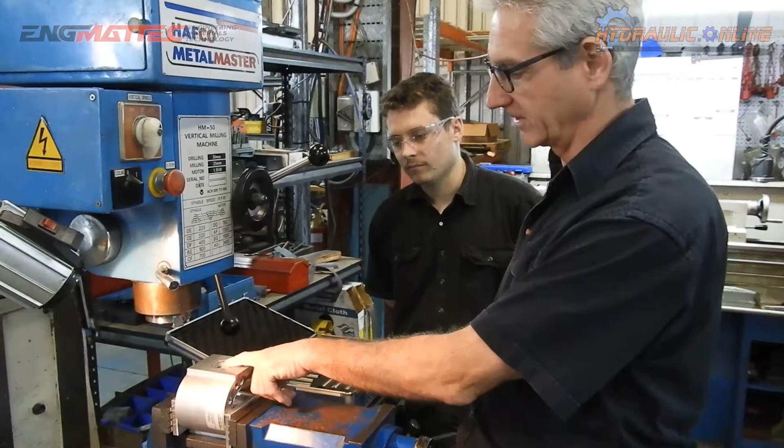It's going to vertically bore a damaged port because the threads are shagged. Doesn't look too shagged there, but if you look there...

It's a UNO port, an 1 1/16 UNO port, and we are going to bore it to 1 inch BSP parallel. So this is a vertical mill, and we're going to change the chuck here. We actually use this mainly for drilling, but we're going to convert this. This is actually a milling drilling machine, but we're going to convert it into a vertical boring machine by changing this attachment. And then we're going to mount this in here and vertically bore a larger size hole so we can cut another larger thread and save this housing. Now if you're in the US or continental Europe, you could probably just buy this part from a number of manufacturers.

This is made by Galtech in Australia—Galtech in Italy, I'm sorry. We can't buy just this part.

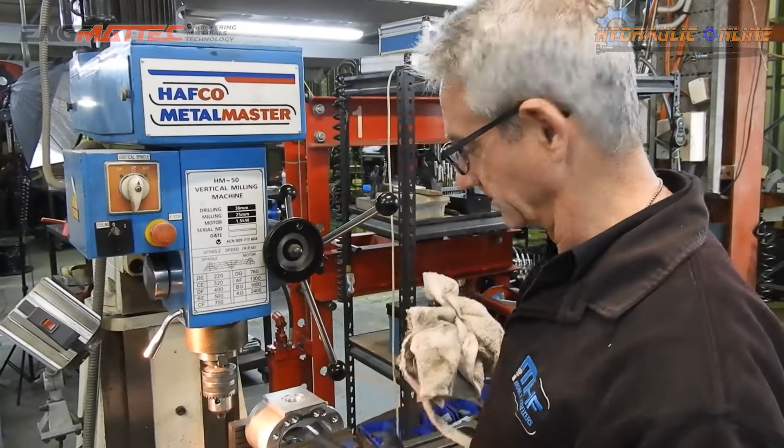So we tend to compromise, modify, and do what we have to do to make things happen. So what you're seeing tonight is how we make things happen. Yeah, it's normal. Ready? That's just normal.

Well, it's pretty impressive, eh? And what's its purpose? That's to bore something vertically in a mill. Very accurately. So what are we boring vertically in the mill today? A housing, from a pump. What kind of pump? Don't know.

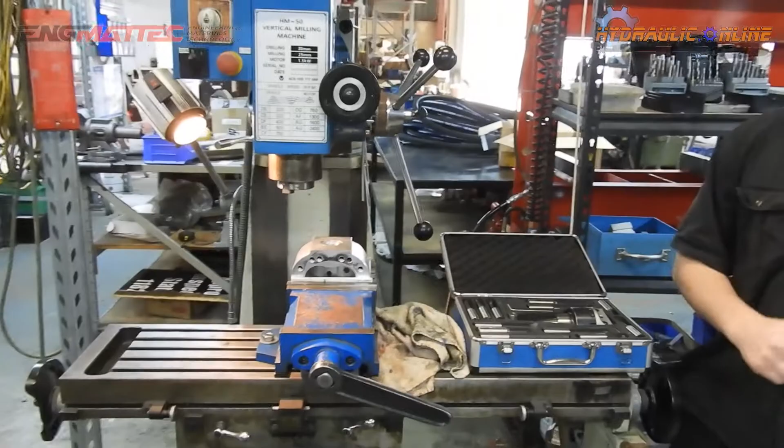It's boring. It's going to vertically bore a damaged port because the threads are shagged. Doesn't look too shagged there, but if you look there, it's a UNO port—an 1 1/16 UNO port—and we are going to bore it to 1 inch BSP parallel.

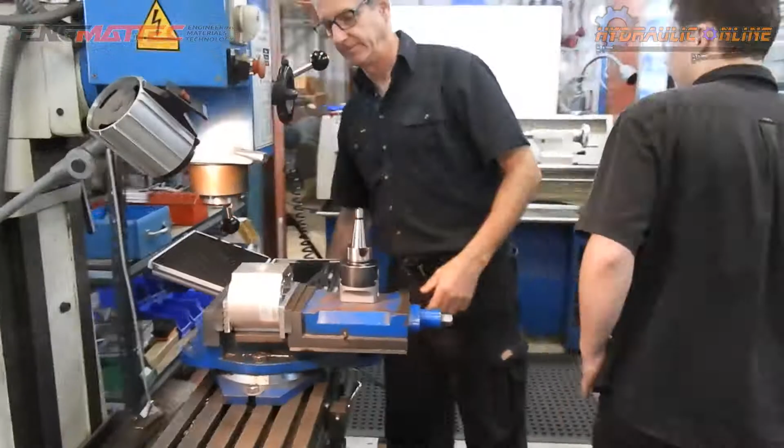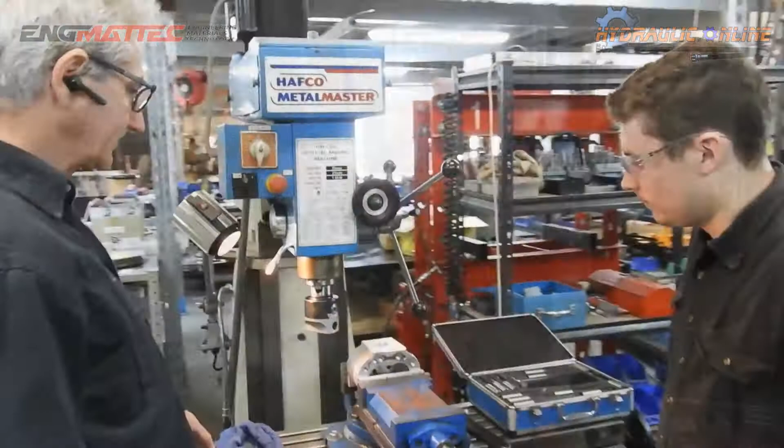The beauty about this is you can do very small holes by installing these cutting tools. So if you put it in here, you can cut a very small diameter hole. You have certain adjustments with this here—when you turn that, it offsets that.

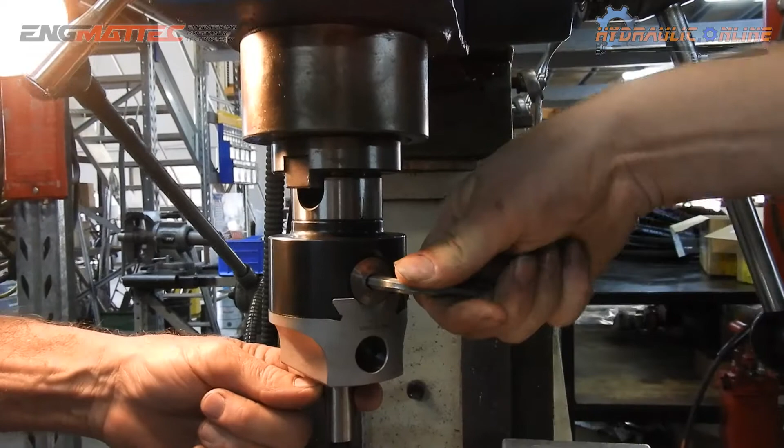Put the Allen key in there and just show them what happens. It's quite firm—as in back? Yeah, either way you go. As you rotate, see how this is offsetting? See how that offsets as you rotate it? So that's actually moving that in that direction, which means it'll cut a bigger and bigger diameter incrementally.

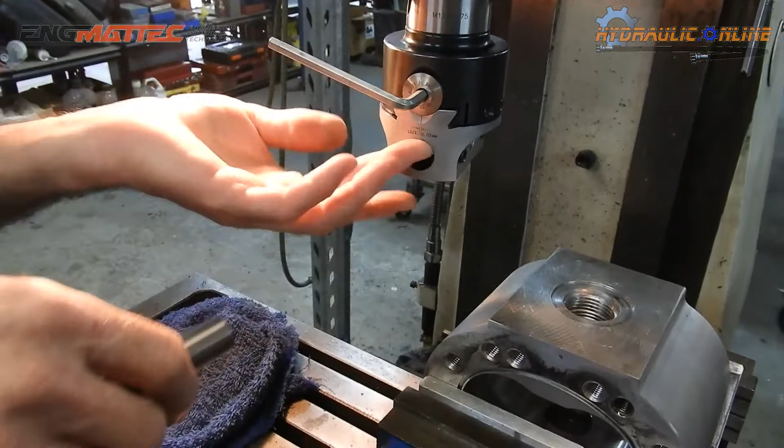However, what we're doing today, chances are we will just be using the middle hole. There's so many. All right, so how far down are we going to go, Seth?

We're going to be going down if we get our vernier, just come from here. We want to go down from the top, but we want to leave at its minimum depth, at least 3 mil. Just go down until you touch my finger.

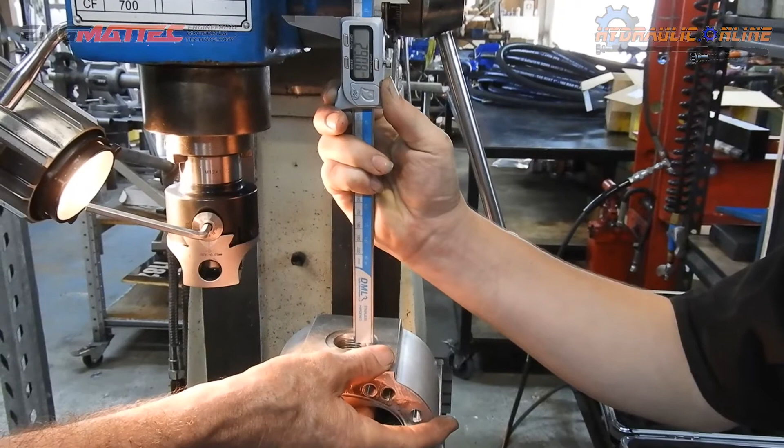Hang on a second, can't even get in there. Just keep coming down, keep coming down, keep coming down. I'll tell you when to stop. Okay? Stop. What's that depth? 30.53 millimeters. 30.5. Let's remove a minimum, a max of 3 millimeters from that.

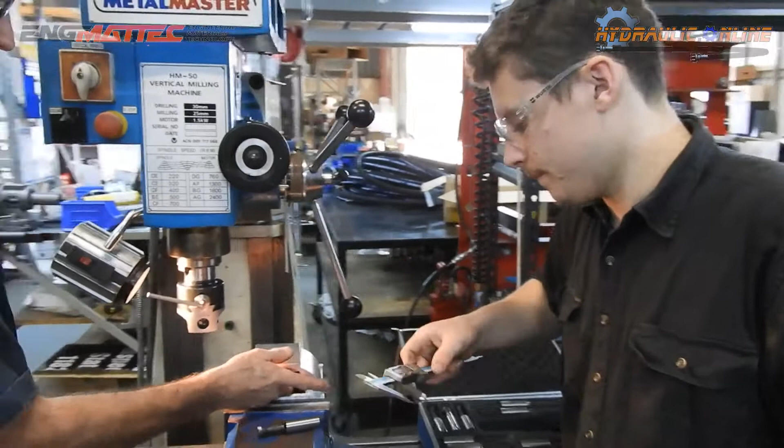You want to leave 3 millimeters of shoulder, so we'll be 30.5 minus 3. We're going to be cutting 27. So our depth of cut is no more than 27 millimeters, yeah? Yeah, on the top here. All right?

What we also need to do, this flat face here, we need to machine that just a little bit bigger, because the fitting we're going to put in here has got a slightly bigger O-ring, so it needs a slightly bigger sealing face than what's currently here. So we also need to cut a new sealing face here as well. All right? But the first thing we'll do is put this in.

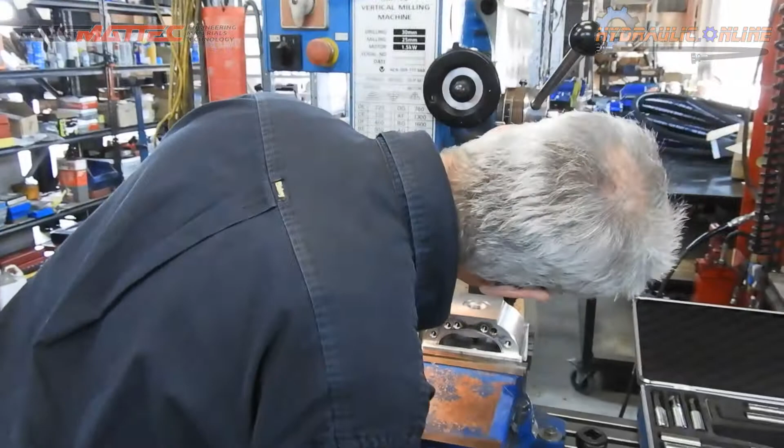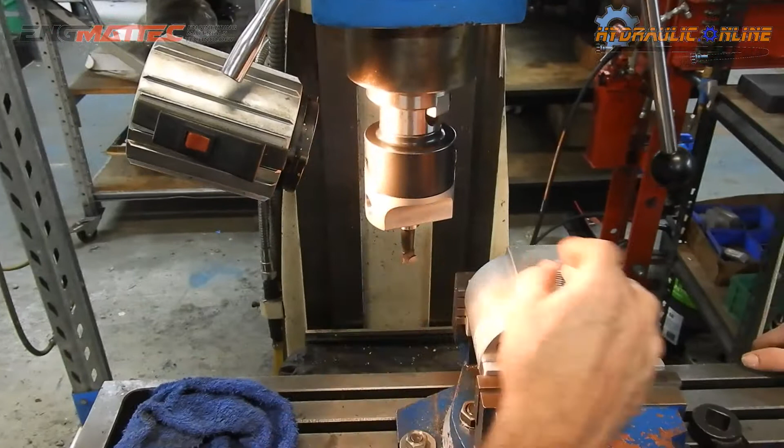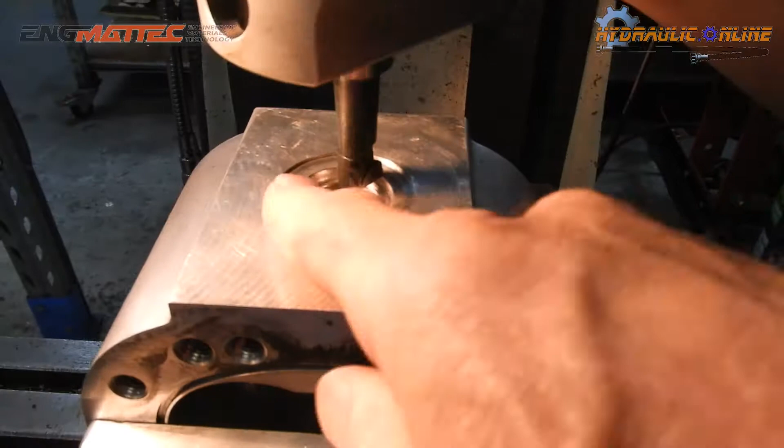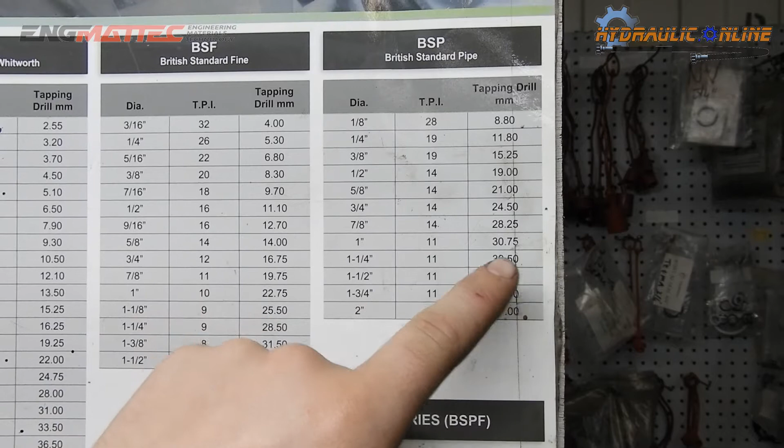So today we're going to be cutting a 1-inch BSP internal thread, and we must find the boring size before we cut the thread. We go to our chart here, and we've got our BSP chart, and it gives us our imperial sizes. We're looking for 1-inch BSP today, and we want to know what we need to actually bore our hole out to. And if you look at the tapping drill size, it'll say 30.75 millimeters.

And if you were to be cutting an external thread, your threads per inch would be 11 on your lathe. On this dial, on our dial, on our up and down dial. Yes.

Each increment in between 10, 20, 30, 40, etc. is 0.02 of a mil.

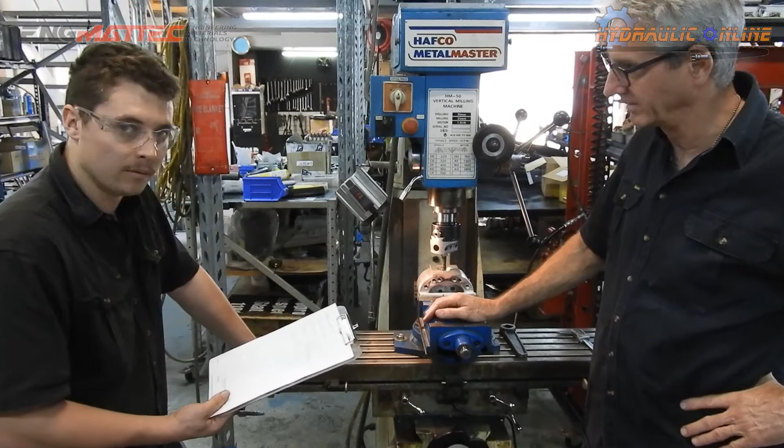A full revolution is 4 millimeters, because if 200 is a full revolution on our dial, and you times that by 0.02, that equals 4 millimeters. So a full revolution is 4 millimeters.

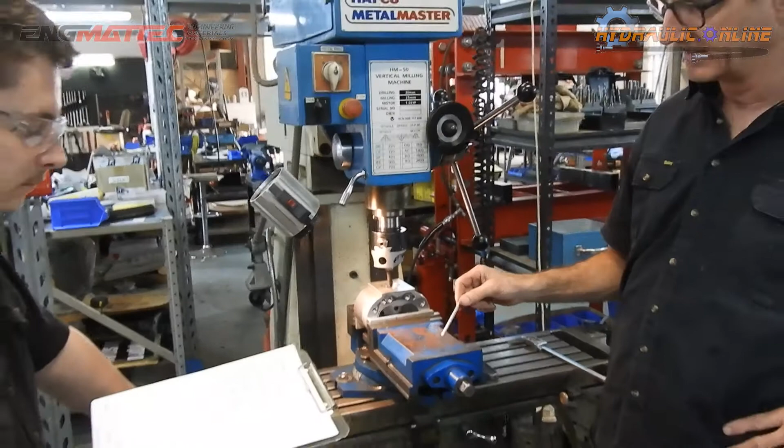So if we want to go down 27 millimeters maximum, how many revolutions is it? 6.75. Alright, so on the dial, we'll go 6 full turns, which will get us close, and then we've got to go 0.75 of a turn.

So 0.75 times the 200 graduations is how many graduations? 150 graduations, not 150 millimeters. Yes, we want about 3 millimeters.

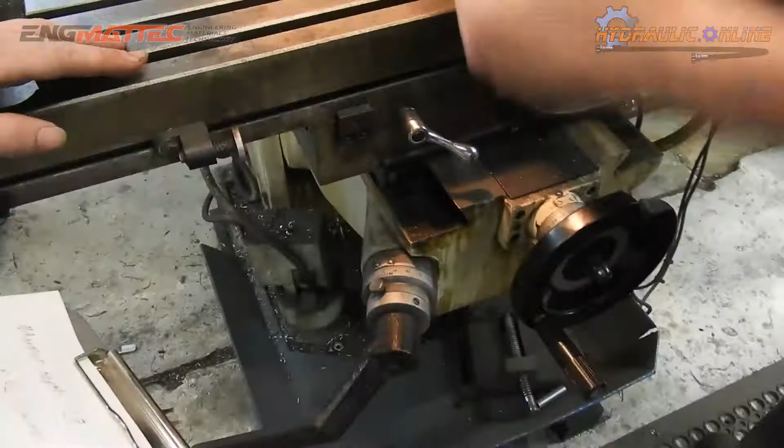Alright, so we're going to take a very light cut. Start at 0. We're going to start the machine. Make sure it's not vibrating too much, because what we've started to do now is we've actually got an unbalanced load when it's rotating, so it might vibrate a little bit. That's locked.

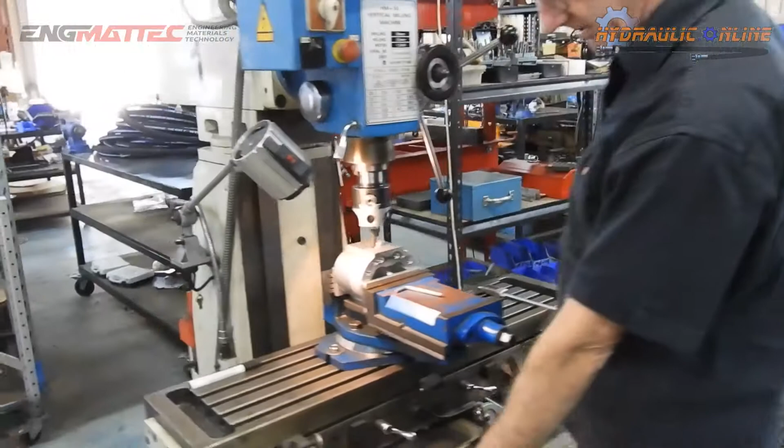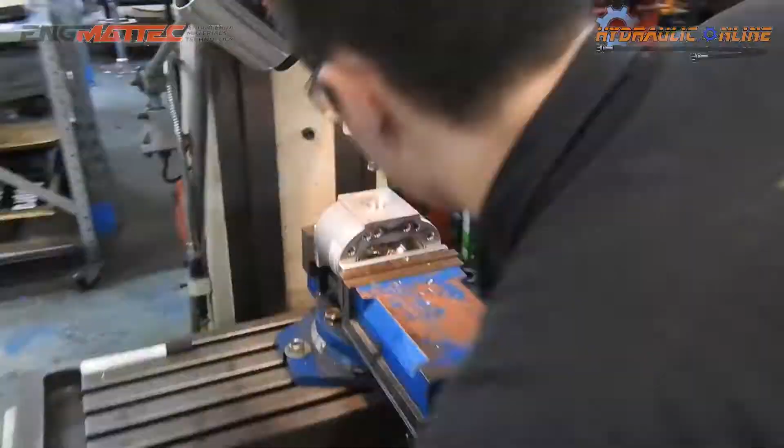We're ready to start. Hit the start button, and then we're going to go 6 turns, and then 150. It has to be nice and smooth. Ready to go. So if we look at this here, alright.

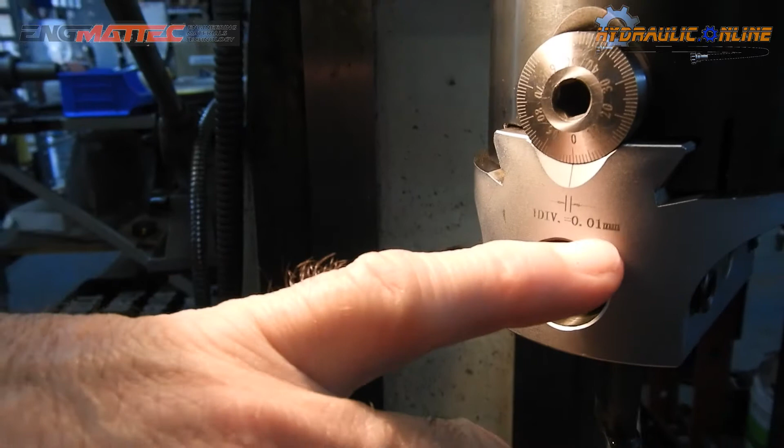What numbers do we have here? We've got from 10, 20, 30, 40, 50 up to 100. And each graduation is 0.01 of a millimeter. So one full revolution is 100 times 0.01, which is what?

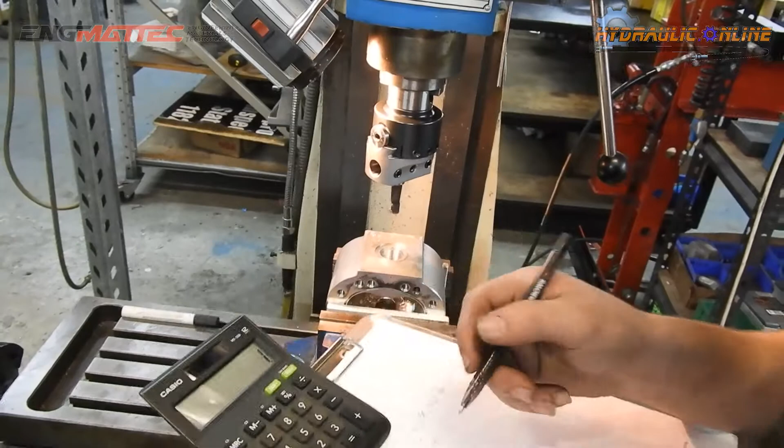1. Confirm it. So according to our calculations, 100 times 0.01 is in fact 1. So 1 what? 1 millimeter. So if you go a full turn on that dial, it's going to bring this out 1 millimeter.

Which is going to do what when you actually rotate it a full revolution? It's going to take double. Because if you go 1 full revolution, you're going to move this out 1 millimeter, which means it's going to cut 1 millimeter off this side and 1 millimeter off this side.

So you're going to increase the diameter by 2 millimeters. That's right. So we have to go, we were at...

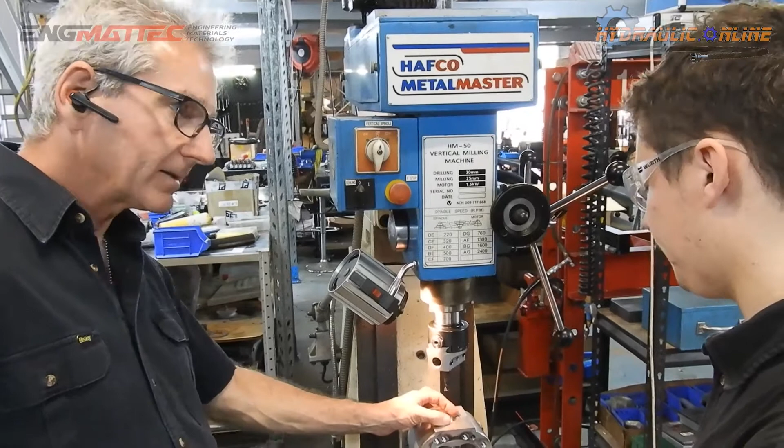We're not going to take 1 full cut. We're going to go a full revolution and then take a 1 millimeter cut.

Beautiful material, isn't it? Machined so beautifully.

You didn't move that out, did you? I haven't moved anything. Have you? You have to go... which way are you going? We're gonna have to go back that way because we're gonna bring it in.

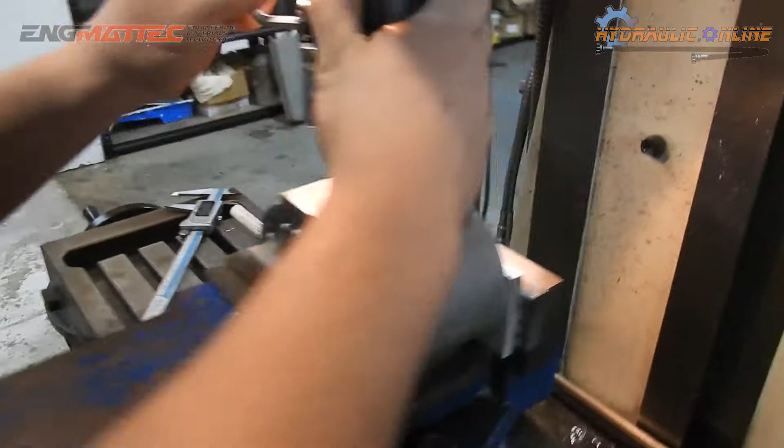Okay, so make sure it's set on 0. If 1 full revolution, are you going in or are you going out? I'm going in to... what's happening to your tool? Watch your tool, which way did you just go? Hold up, let me see. No, that's right, what I was doing was right. So which way are you going? You're going anti-clockwise to bring it out.

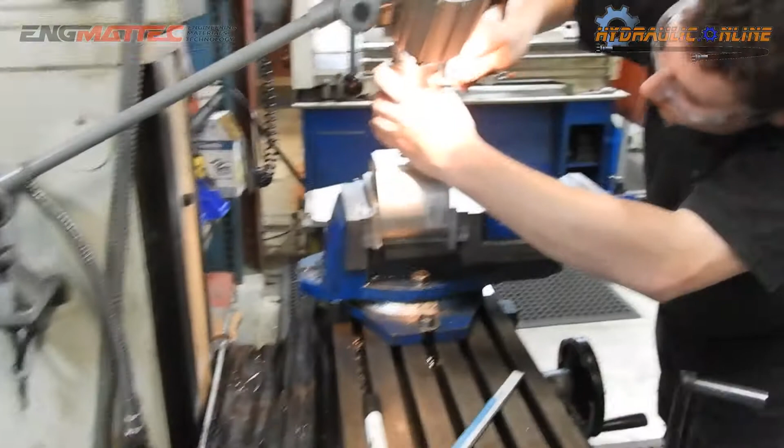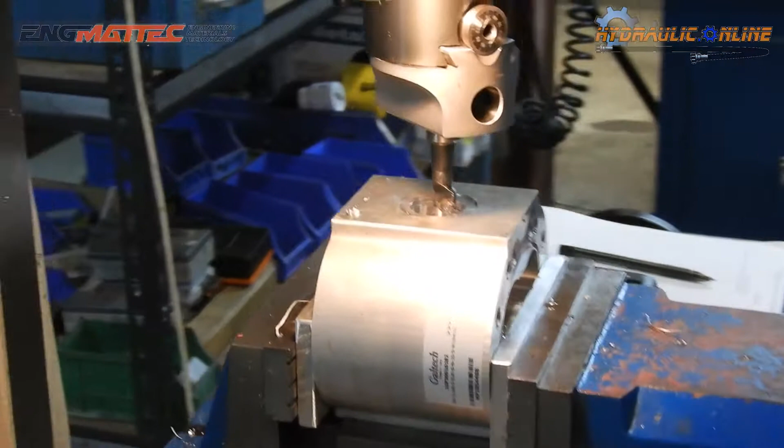Remember, you can't go back, you've got to go quick, gently to the right position. Alright, so you've got a full revolution. Does it look like you're going 1 millimeter? I don't know. Start your flywheel. And then you're at 0. I'm gonna get it. Here, it's actually 0 now. Okay, go.

That's what you're doing, that's your work. You've got to go 6 turns. Just remember, at the top there, you've gone 1. You're going to go...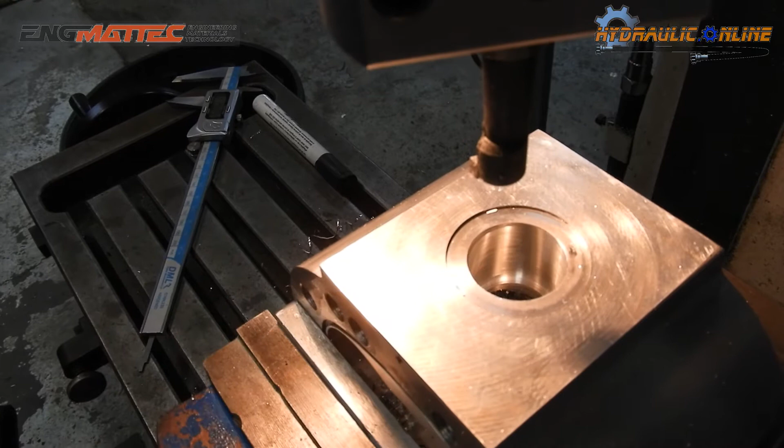Alright, see, as you drop it back out, there's still a little bit of flex there. So when you're dropping back out, drop out a little slower because it's still taking a tiny cut as you drop it back out. So where are we at? Double check.

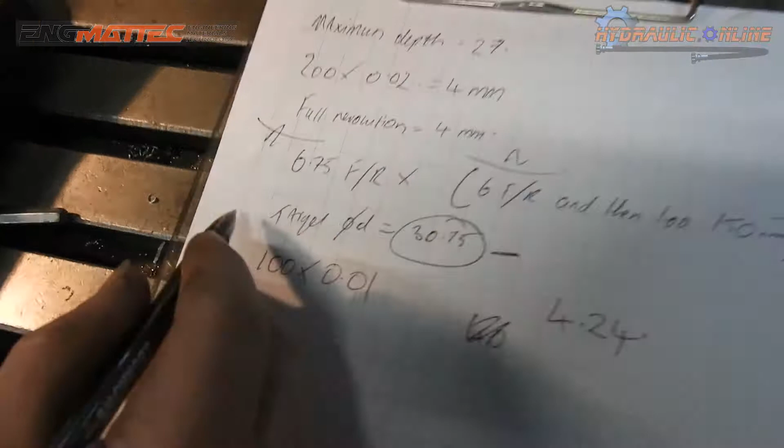Tighten them up so they don't actually move, and then you put them into the hole diagonally, and then you actually straighten it out, and then you pull it out, and then you measure that. So measure this, what are we at?

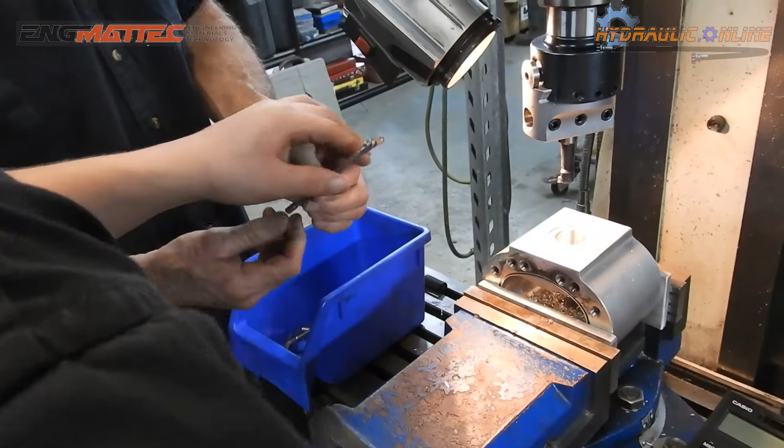Point 6. I think mine's more. Yeah, I was going to say, target OD is 30.75, and we're currently at 28.7. So what's left? One more mil.

Don't guess, I don't want you to guess because you're crap at math. That's incorrect, it's 30.75. What did we just measure? Write it down. But that's not correct, he's at 28 point something. What's the target? 30.75. Enter that first. 30.75 equals...

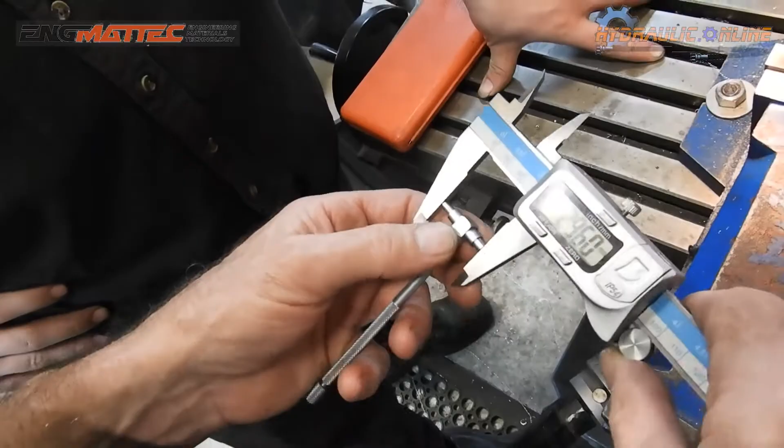Because it was half a mil. Where does he get his numbers from? He just pulls them out of the air. You pull them out of the air? No, there's measurements. What I'm trying to get you to understand is, what did you do here?

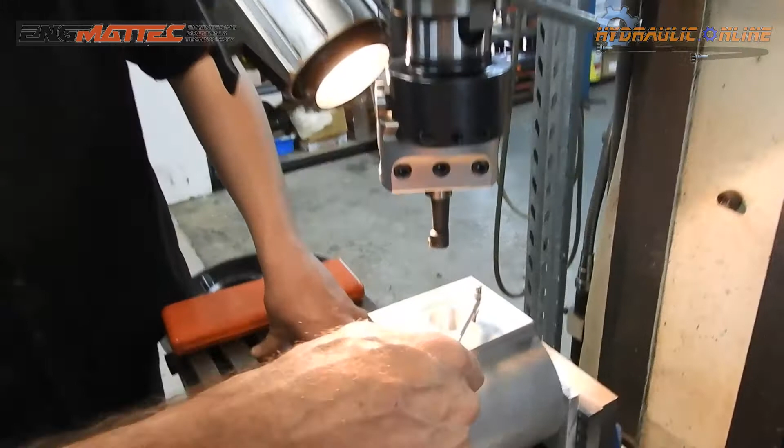I only told you to do half a turn. So half a turn is meant to do what? Half a turn moves this out how far? 0.5 of a millimeter, so it's going to take 0.5 off this side plus 0.5 off that side. So it should have taken a millimeter off this diameter. So we've got to go 55 and a half more little graduations.

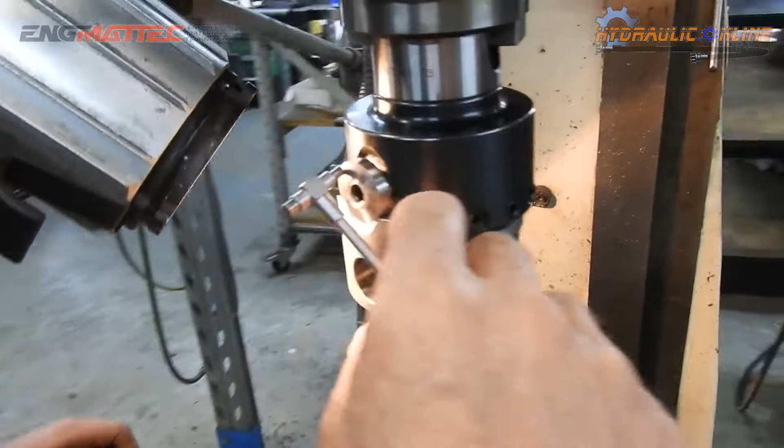Okay? So where are we going to go? We're going to go to 0, and then we're going to go another 5. Yeah, all right? Okay?

Remember, you can't go back. You can only keep going forward.

Oh, that's lucky, eh?

Is that 0 or is that at 5? That's it, 5. All right? Start up, do your final cut.

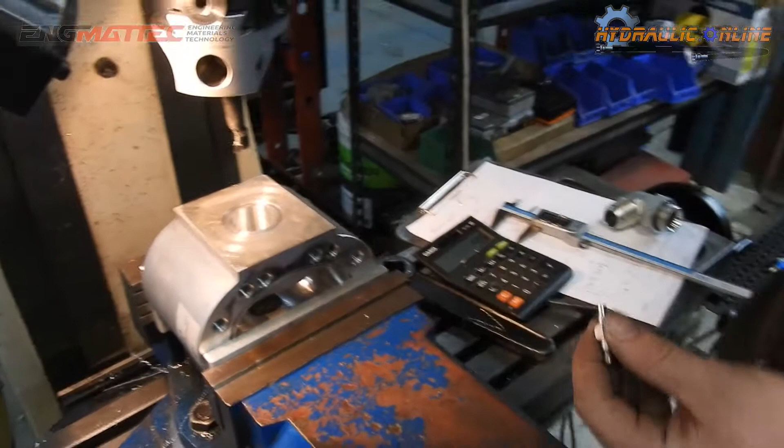So we got the right measurement. There we go. Thank God for that.

Cut a thread into here so we can fit this fitting into there. All right?

This recessed area here is called a spot face. All right? I don't believe the spot face is big enough in diameter to take it.

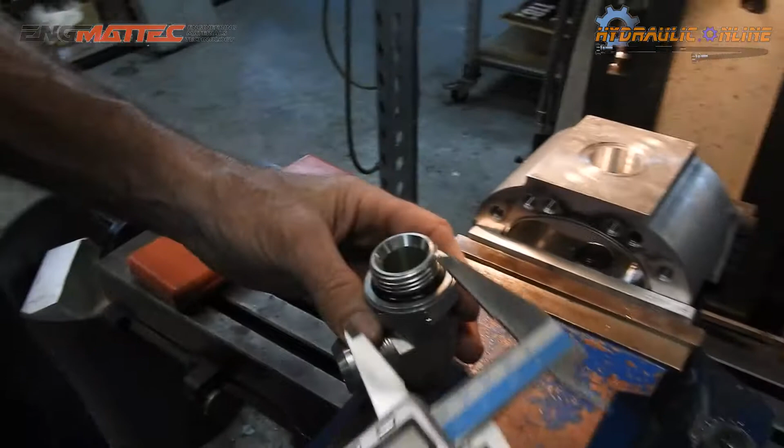See that? We're a little bit out. We're at 42.9, and we should go to about, just to be on the safe side, 45.2. What was your first measurement? 42.5.

What do we want? 45.2. 32.7. So where are we at now? We're at 30.73 and we've got to go out to 45 point...

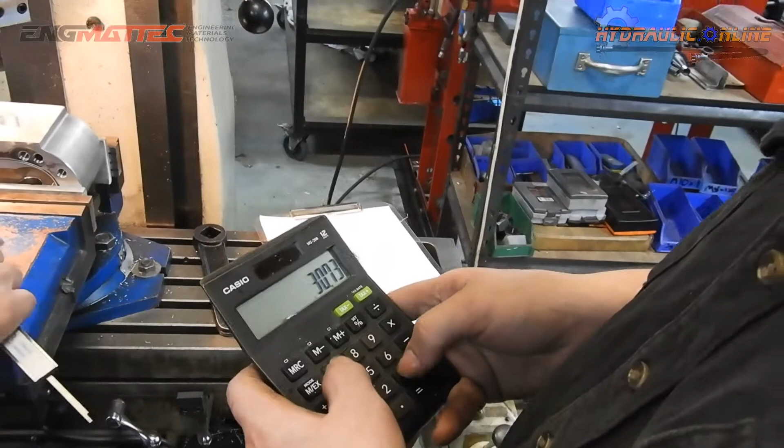We go out to, this is for the face, isn't it? Yes, yeah, but we know what this diameter is. How far out more do we need to go? I'm just not sure we can do it. We might.

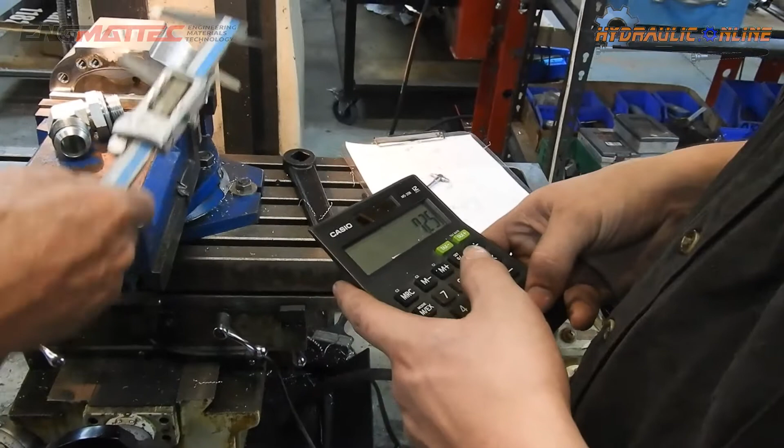14.5. 14.5 divided by 2. 7.25. We've got to go out 7.25 millimeters, right? So that's basically 7 turns plus a quarter of a turn, correct, from where we are now.

Just check the diameter. Is this someone's job?

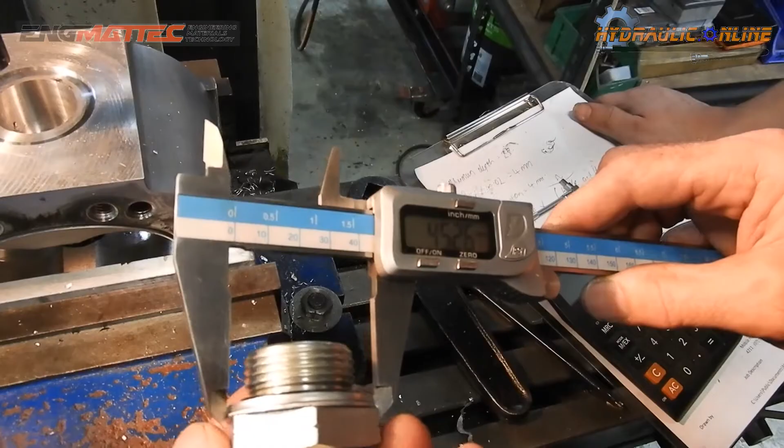Alright, so we've got some clearance now. Alright? It's 45. That stays vertical, later you do it up with the...

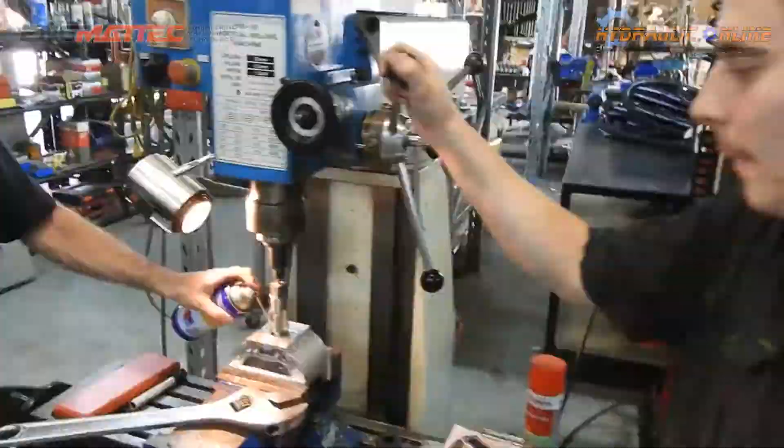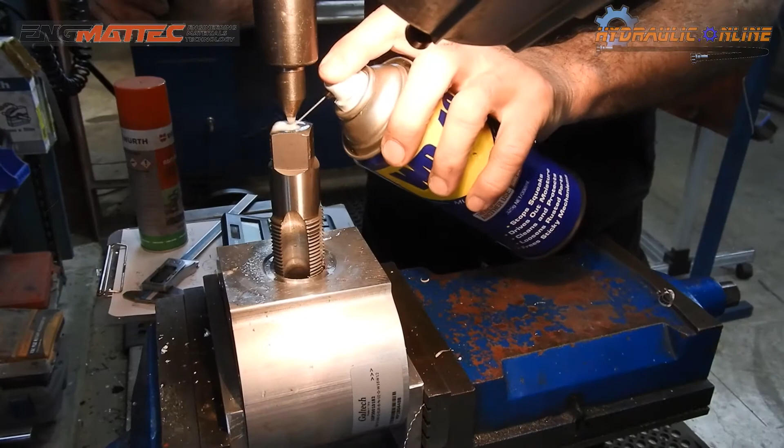A couple of turns. Go one more turn, then I'll come back, and then I'll stop and break the burr on the way back. Just wait there a sec, because it's not a machine tap, which is a fluted machine tap.

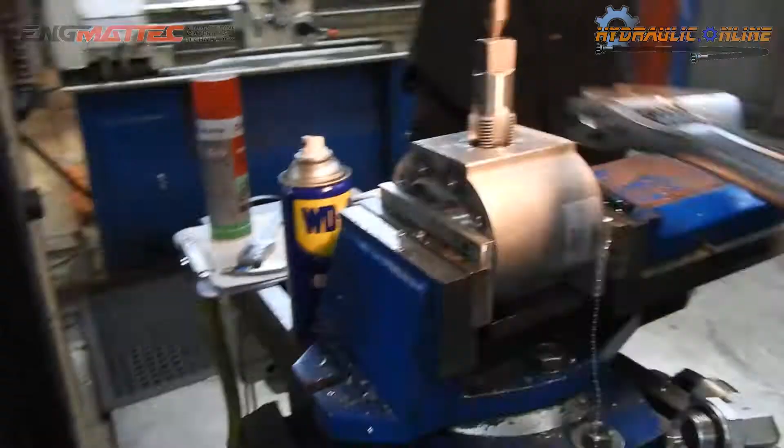Beautiful. Beautiful. So you can lock this up in any position. Okay.

Job well done. So now, what do we do? We assemble the pump. Or do you want to have some lunch first? Yeah, I'll go on lunch.

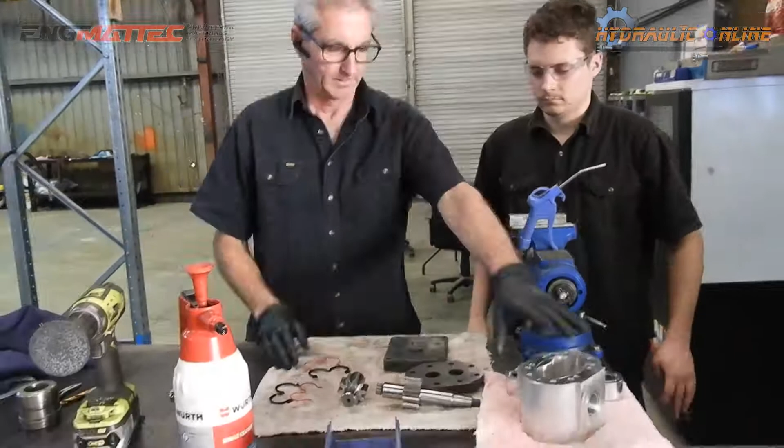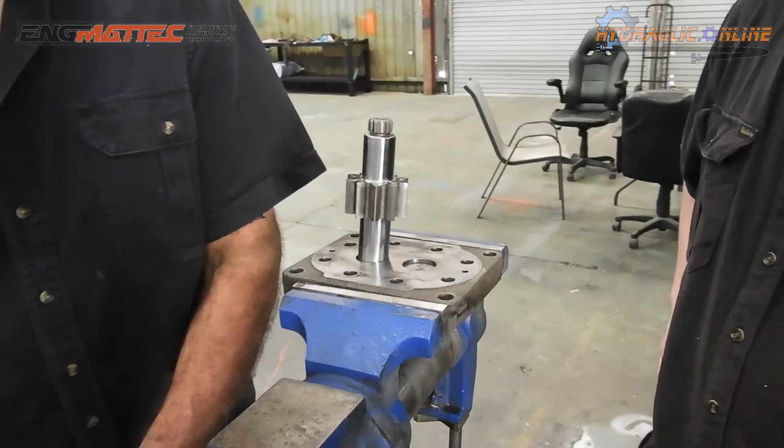See the marks. This is the shaft side, so this side needs to be really well aligned so that the shaft comes through here. So those little marks need to have dowels put into them. Alright, so push those little dowels.

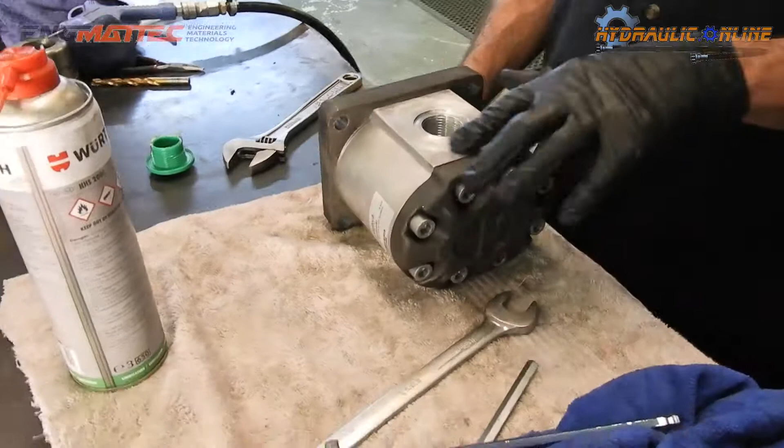People don't understand this is the pressure port. So why don't we stamp it? So if you look at that, oh, that means pressure, doesn't it?

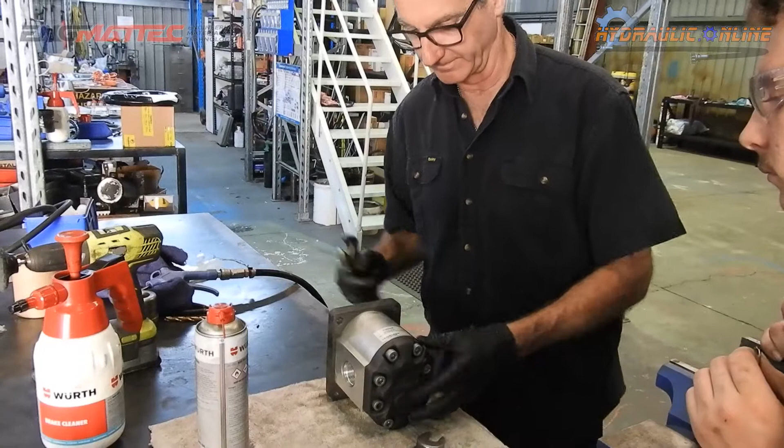Right, that arrow is saying rotation. So what that means is the rotation is correct. So if you look in the gear, right, see the arrows pointing down and you rotate in that direction, yeah?

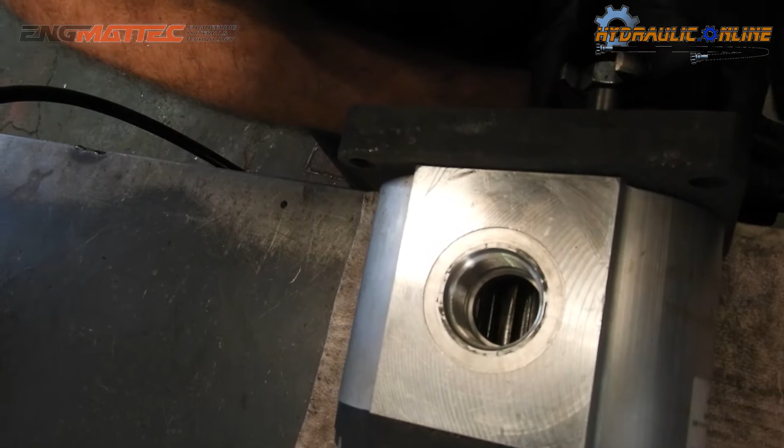If you look in here and the gears as they're rotating are coming towards you, that means it's actually sucking, because it's pulling the oil in there, and then the oil's going around the outside on this side and the outside on that side, all right?

So when it's going out the other way, it means it's pushing. And then I'm still rotating the same way. All I'm doing is coming to this side, still rotating in the same direction. See how the gears look like they're meshing together?

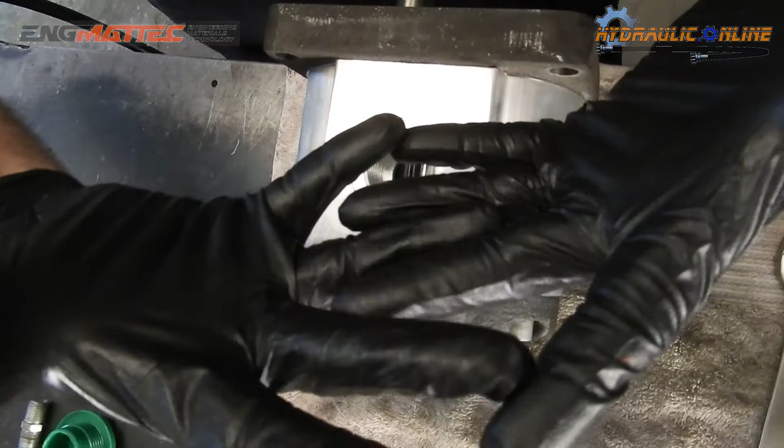That means that's the pressure side, that's discharging oil, because it's coming around the side of the actual housing. Because the oil's coming around the outside grooves. The oil can't go down the middle because the gears mesh together. There's no way for the oil to go down the middle. The oil has to come out this way. Do you get it? Yeah.

So this is the pressure port. All right, so we're going to get a letter stamp and actually put a P here for pressure, and then we're going to stamp the other side S for suction, so nobody can stuff it up. I'll go do that now. Okay.

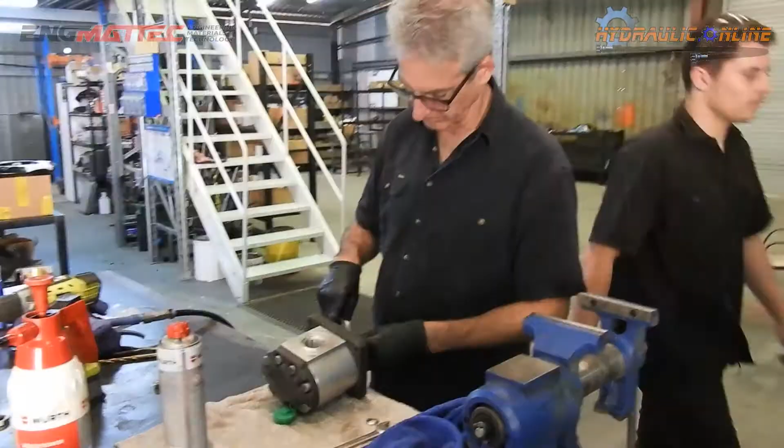Okay, you. I am a fitter. All...

Alright, there's the P. Alright, for pressure.

You can do the S. Put the S on that side there. On that side or that side? Oh, there.

Okay, I would have put the S that way rather than that way, but you know. Right.